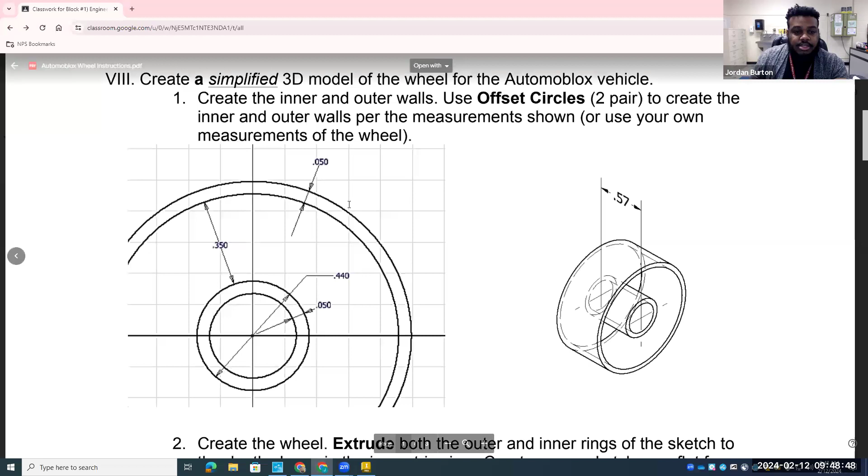So when we go to the dimensions, we're going to follow these dimensions here. We're going to make the two inner circles and then dimension the two outer circles. First thing we're going to do is this right here. That first circle looks like it has a diameter of 0.44.

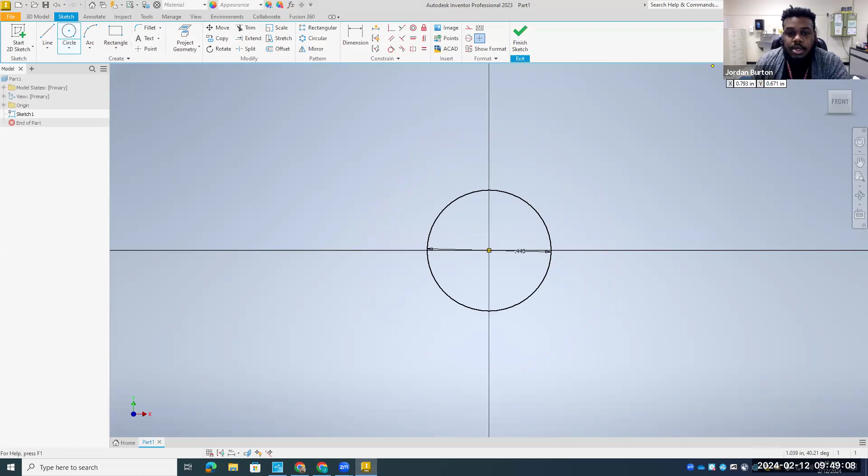So to make a circle from the center, type in 0.44, and we are good to go. Then you're just gonna make another circle around it, and to dimension it, it says 0.05.

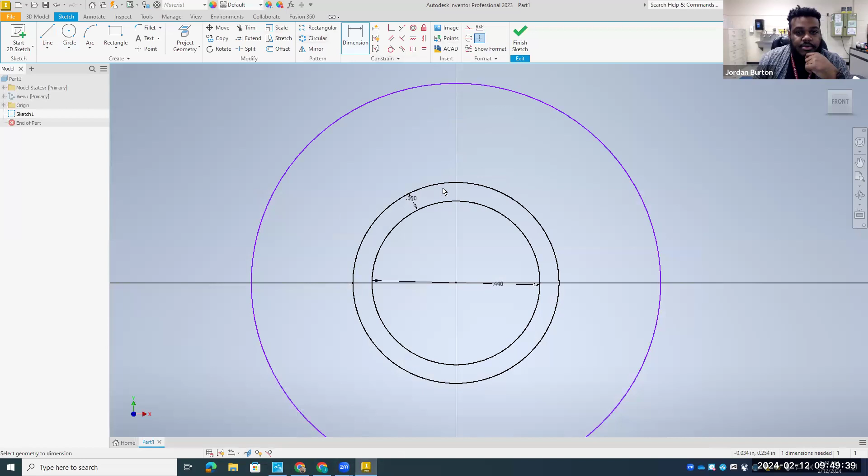All right, we're gonna make another circle around this one, and we're gonna dimension that one. Doesn't matter how big you draw that one because we're gonna dimension it anyway. It says here 0.35, so from here to here, I'm gonna type in 0.35.

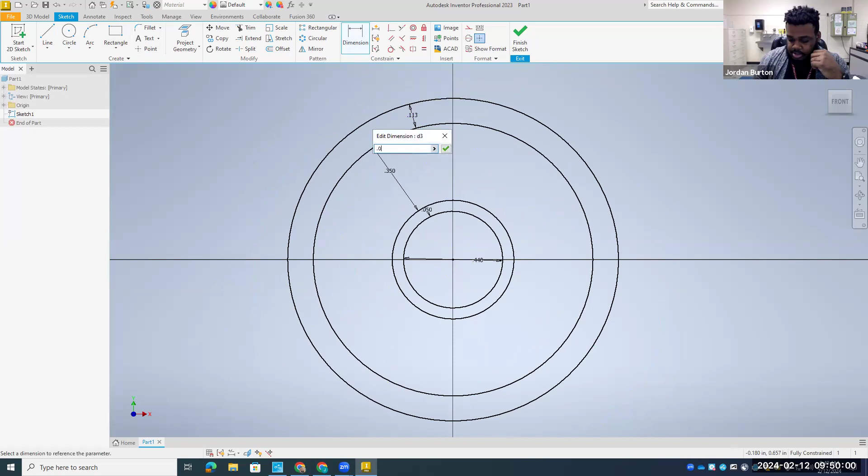And then it looks like there's another circle around that one that is also 0.05 as well. So let's draw that circle and then dimension it to be 0.05. All right, we're gonna finish that sketch and we are going to extrude it. Now when we extrude it, we see here it is 0.57 thick.

So we're gonna click that circle and that circle. We're going to change it to 0.57. Cool. Now what we want to do is do a sketch here.

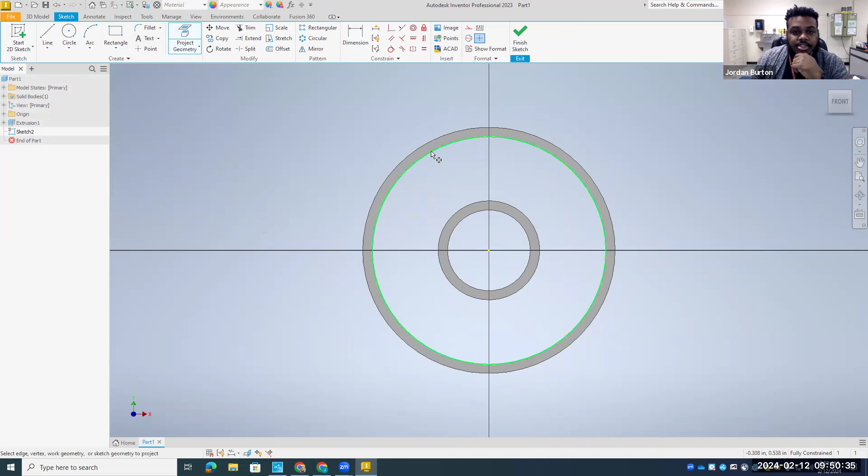And we want to project the geometry, also make sure you hit project geometry. I want to click the outer circle here and the outer circle, let me slide down to the directions. Okay, yeah, we want to click the inner circle right there. So here and here. We're going to finish that sketch.

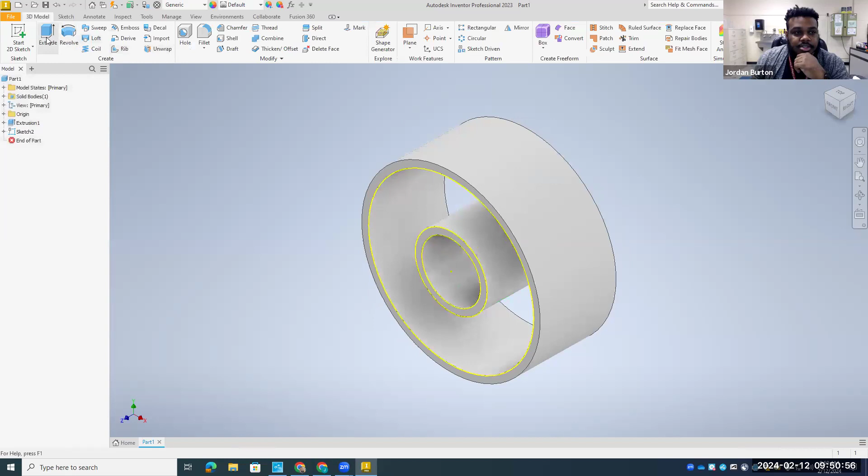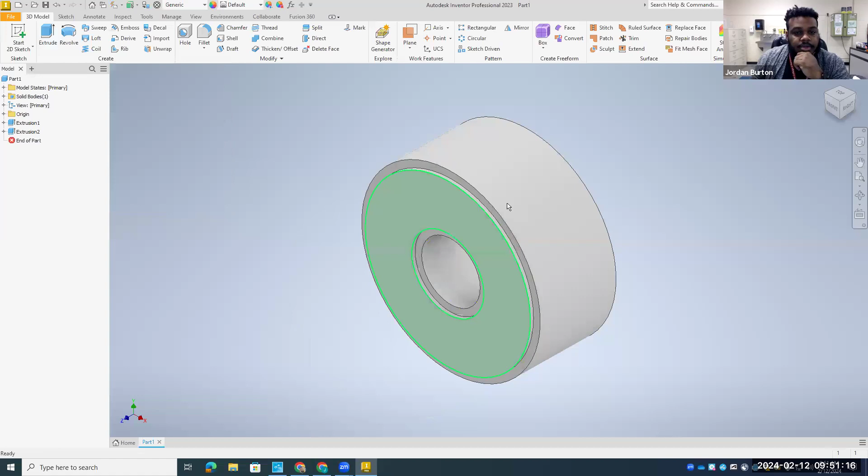We are going to extrude that by, yep, right here, 0.05. And you want to make sure we hit this so it goes both directions like that. Cool. All right, so we're almost done.

We are going to do another sketch up front, and we're going to make these wheel thingies here and do the circular pattern. All right, so since we built from the origin, we're going to go up here to this point and sketch a circle with a radius of 0.25.

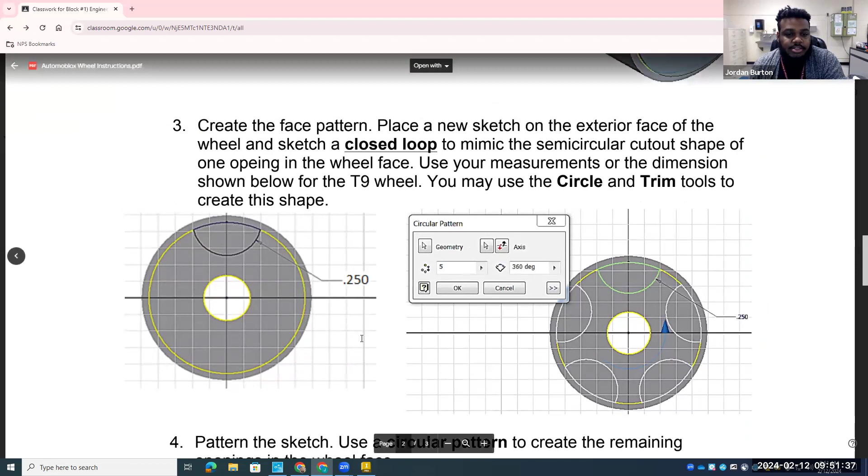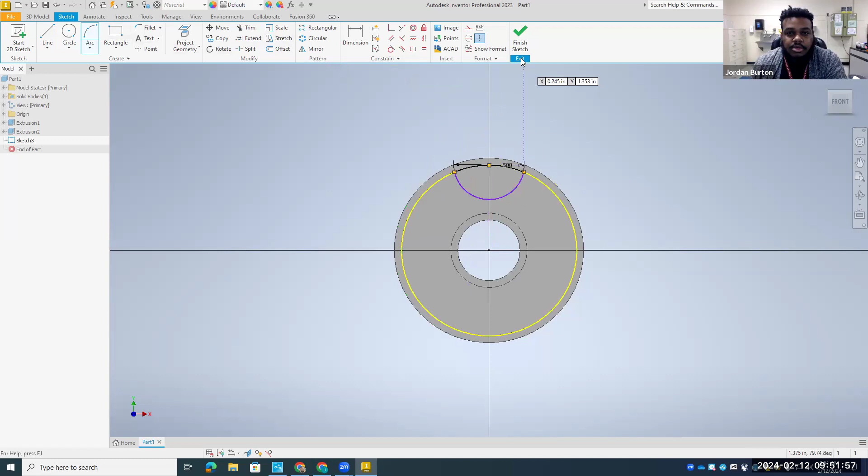So right here, and we know if it has a radius of 0.25, then it has a diameter of 0.5. So just type in 0.5. We're going to grab this button here that says trim, cut that excess off the circle, and then grab the arc button, draw that up, and we're going to finish sketch.

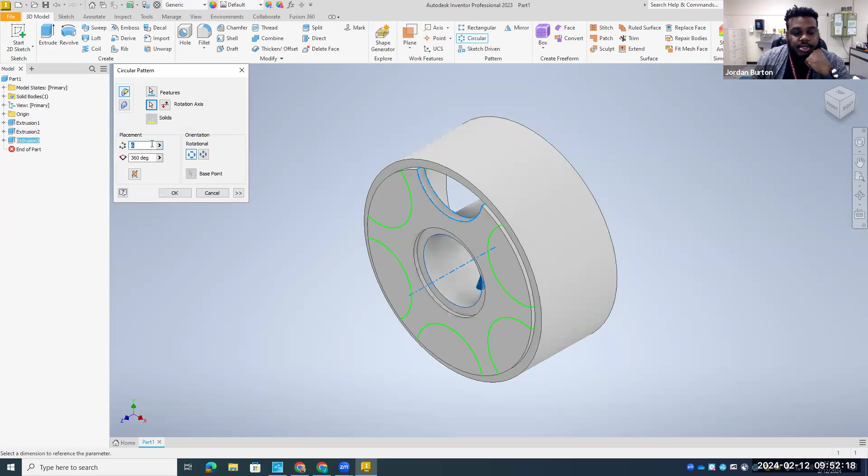So what we're going to do now is cut this back by 0.05. And then we're going to grab the circular pattern, move this around the rotation axis here, and we want 5 holes. And there you have it. You have just completed that Automoblox wheel rim.